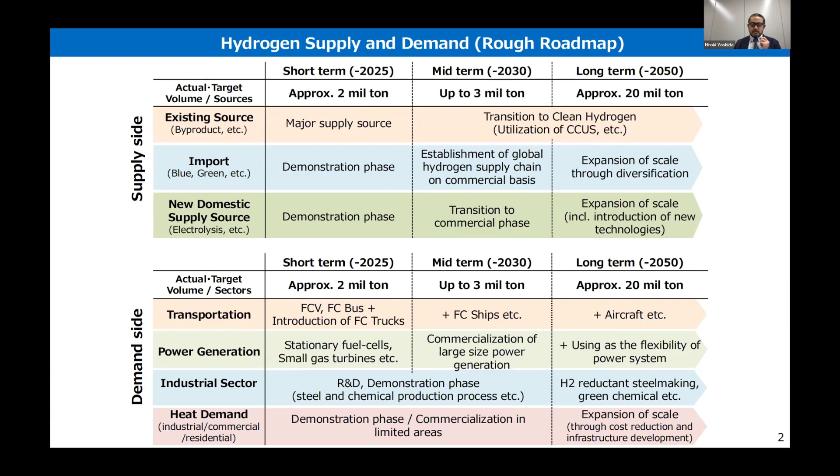We are conducting large-scale electrolyzer demonstration projects in Fukushima and Yamanashi: an alkaline electrolyzer plant in Fukushima Prefecture, and a PEM electrolyzer plant in Yamanashi Prefecture. Currently, large demonstration projects are underway for further increasing electrolyzer capacity, improving operation, and reducing cost of electrolyzer.

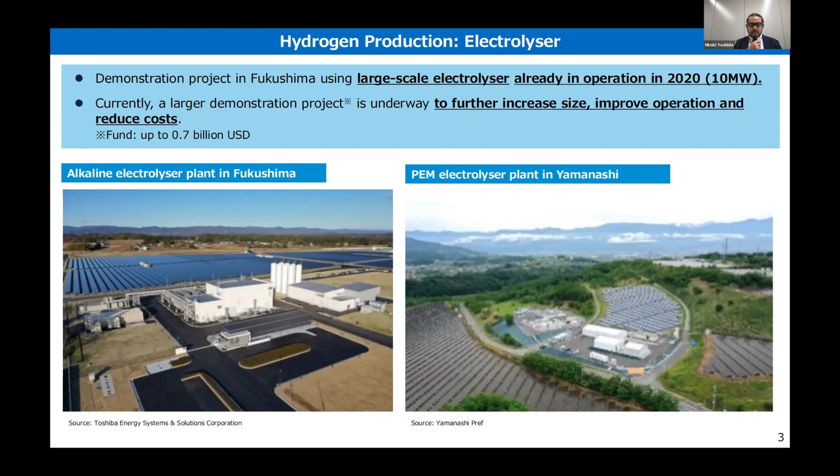We are now developing international hydrogen supply chain. Methyl-cyclohexane, MCH, as a hydrogen carrier, the demonstration project was completed in June 2020 between Brunei and Japan. A liquefied hydrogen carrier completed the world's first maritime transport to Japan in February 2022, including loading and unloading of liquefied hydrogen, followed by a large-scale demonstration project aimed at commercialization by 2029.

Japan does not have sufficient renewable energy potential, and Japan is an island country, so Japan is developing maritime transportation technology for hydrogen. We believe this technology can unlock and enable the potential of countries with abundant renewable energy potential, including Africa and South Africa, for international hydrogen trade.

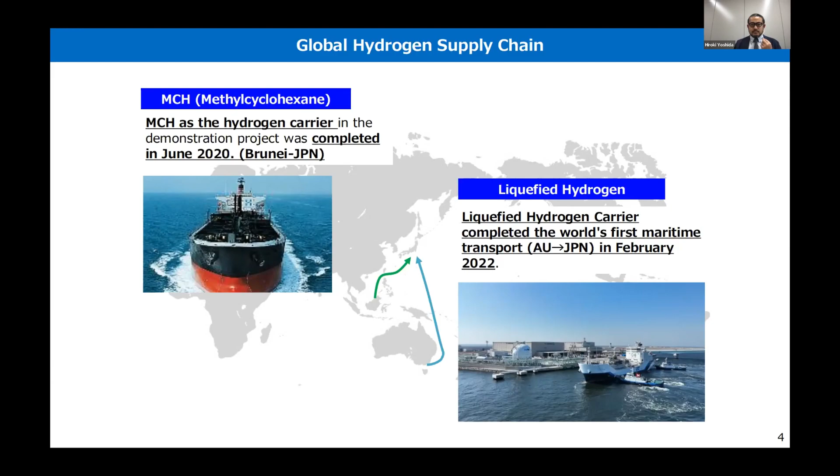Currently, approximately 7,600 FCVs and 180 hydrogen refueling stations (HRS) are deployed as of January 2023. Fukushima Prefecture and Toyota are preparing to start an FC truck demonstration project, including refueling timing management. We are also starting to develop a high-speed refueling protocol for heavy-duty vehicles.

In addition, hydrogen refueling stations are trying not only to expand refueling volume to vehicles, but also to provide hydrogen for multiple uses. Moreover, hydrogen and ammonia are expected to be used in ships and airplanes in the future.

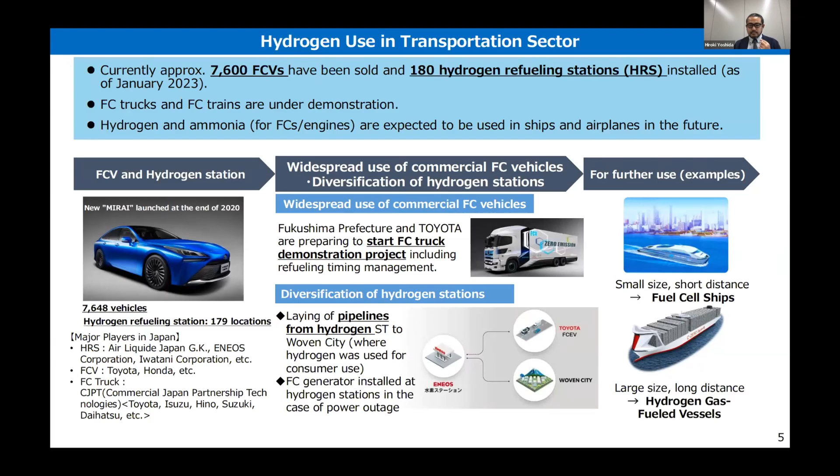Japan has been a world leader in hydrogen power generation technology. Demonstration projects are underway for both large and small turbines. We understand that power generation contributed to balancing renewable energy fluctuations, meaning power generation is still important even as renewable energy sources increase. Japan will contribute to world efforts to commercialize hydrogen power generation.

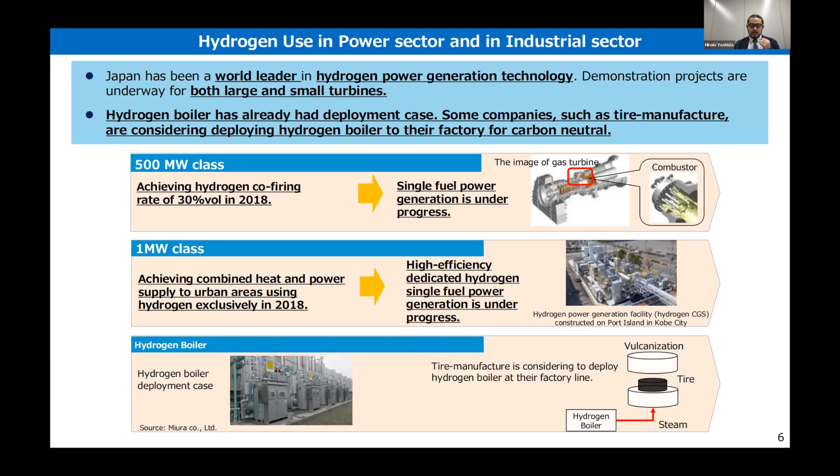Hydrogen boilers already have deployment cases. Hydrogen is expected to be used as a heat source at high temperatures required in industry processes. Projects using hydrogen as a heat source are underway in diverse fields, including auto parts manufacturing, tire manufacturing, and coffee roasting.

In order to create a hydrogen implementation model, we are encouraging regions, private companies, and relevant bodies which have potential for hydrogen activities to start discussion, feasibility studies, R&D, demonstration projects, and/or actual implementation. A kind of regional model or hydrogen cluster is called a hydrogen hub or hydrogen valley.

This is a snapshot of Fukushima. Fukushima Prefecture, located in the north part of Japan, is one of the active prefectures for hydrogen. They have the Fukushima Hydrogen Industry Academia Government Collaboration Committee in order to share progress of hydrogen projects and discuss how to develop local industry with hydrogen.

As you know, NEDO is handling the demonstration project for a large-scale electrolyzer with renewable energy at the Fukushima Hydrogen Energy Research Field, FH2R. Fukushima Prefecture and Namie Town are using hydrogen and fuel cells for their public facilities. This hydrogen comes from FH2R.

Fukushima Renewable Energy Institute, AIST, FREA, conducts R&D related to hydrogen and supports the technology development of companies and universities. Sumitomo Rubber Industries, a tire manufacturer, has started a demonstration project for deployment of a hydrogen boiler at their factory line. Denso, a car parts manufacturer, also has started a demonstration project for using electric heaters and hydrogen burners in their production line. Iwatani and Soma Gas Group, gas providers, have started feasibility studies for blending hydrogen into their gas services.

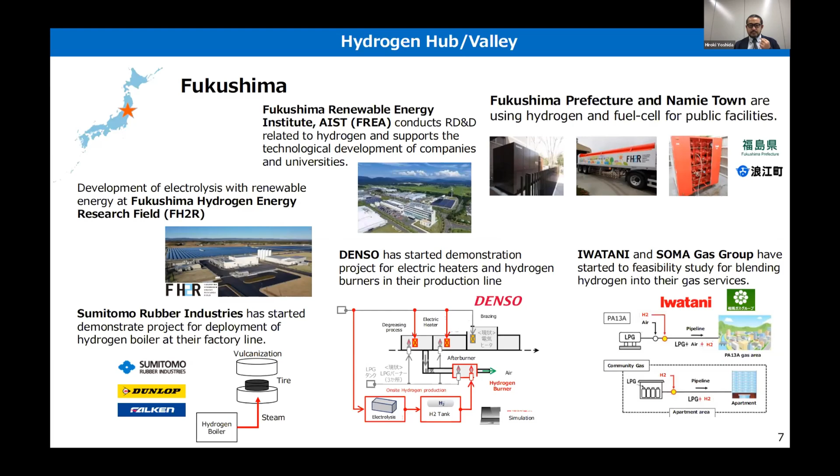This is another snapshot of Yamanashi. Yamanashi Prefecture, located in the center of Japan, is another active prefecture for hydrogen. They have the Yamanashi Hydrogen and Fuel Cell Related Industry Development Committee in order to share progress of hydrogen projects and discuss how to develop local industry with hydrogen.

Yamanashi Prefecture has developed renewable power plants and hydrogen technology for many years. Yamanashi Prefecture started to develop a 16 megawatt class integrated electrolysis system and hydrogen boiler in cooperation with Toray, Hitachi Zosen, Siemens Energy, Kaji Technology, and Miura.

UCC Ueshima Coffee has started a demonstration project for hydrogen heat use at their factory, especially for roasting their coffee product, in cooperation with Yamanashi Prefecture, TEPCO Energy Partner, Toray, and Tomoe.

Yamanashi Prefecture is not only doing R&D and demonstration projects, but they also established the Yamanashi Hydrogen Company, YHC, with Toray and TEPCO Energy Partners to provide power-to-gas services as an output and outcome of their project. In addition, Yamanashi University is doing hydrogen-related R&D, such as electrode catalyst development for high performance and cost reduction. Also, the Association of Hydrogen Supply and Utilization Technology, HySUT, provides human resource development services for hydrogen refueling stations.

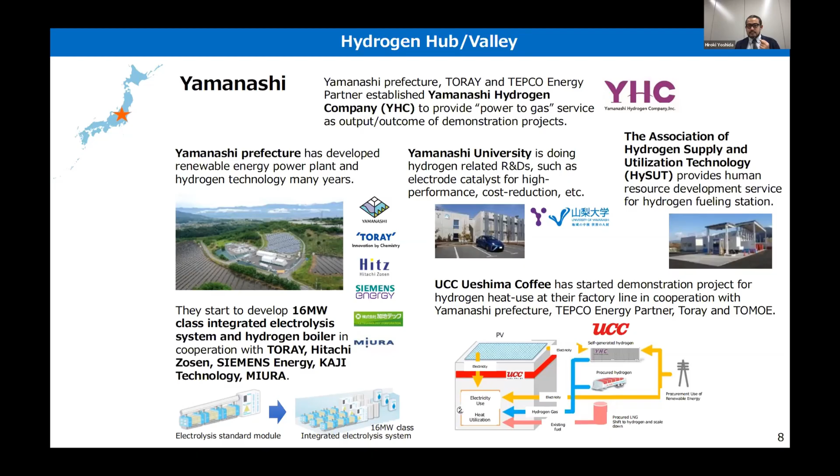We have a lot of R&D and demonstration, but we need more effort to actually use hydrogen in this field. So METI established a new subcommittee for hydrogen policy in March 2022. The subcommittee has had intensive discussion on a support scheme for narrowing the price gap between clean hydrogen and counterfactual fuels for a set period, and on a support scheme for developing infrastructure.

The subcommittee will continue to develop details this year.

Japan launched the Hydrogen Energy Ministerial Meeting, HEM, in 2018. We believe the Hydrogen Energy Minister Meeting is one of the most ideal meetings for hydrogen-related ministers and top executives to express and discuss direction to build a hydrogen society and future initiatives. METI and NEDO held the fifth Hydrogen Energy Minister Meeting in cooperation with IEA as a part of Tokyo GX Week on September 26, 2022.

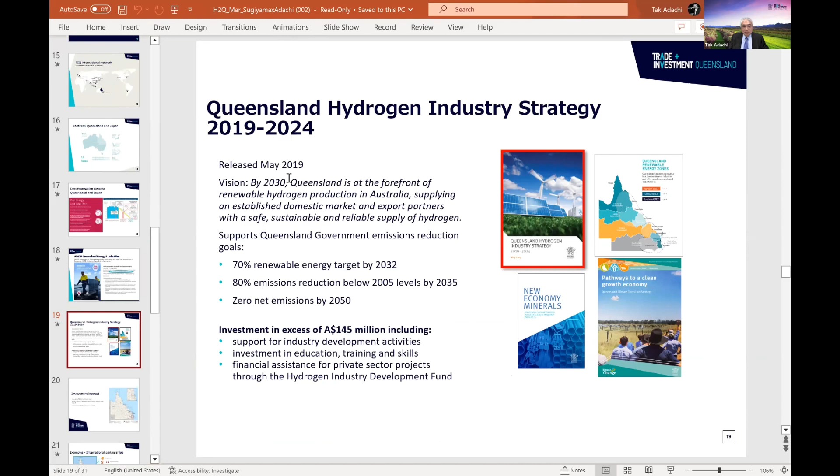We also launched the Queensland Hydrogen Industry Strategy in 2019, the same time our Premier actually visited Japan. Since then, we've been seeing a lot of investment in the renewable sector. We've seen in excess of 100 investment leads across Queensland, not just export-driven projects, but also domestic, local demand type projects.

In the last couple of years, we're also seeing a lot of related manufacturing opportunities emerging, including electrolyzer, pumps, and water-related technologies, which is great for building the supply chain.

In terms of international partnership, I think this whole hydrogen industry development requires more than one country. We need a lot of expertise and strengths from different partners. These are some examples of international partnerships happening across the state, and many of them are Japanese companies. Just to pick up a few examples, even this year we're seeing some of the latest developments.

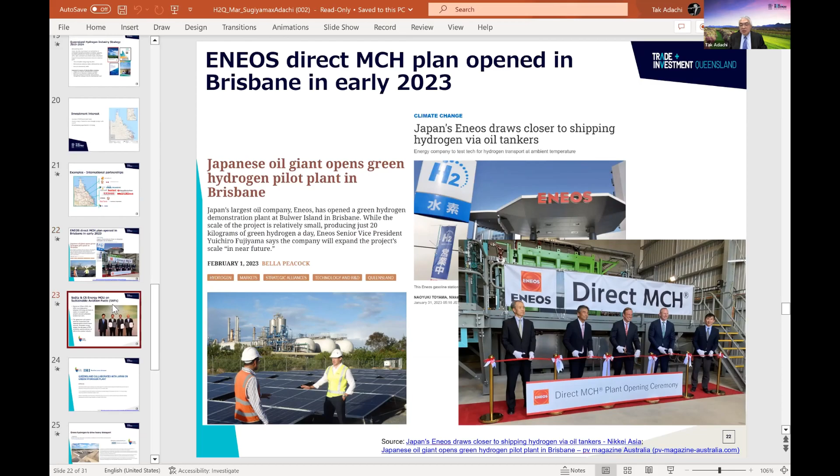ENEOS Corporation opened a demonstration project in early 2023, in late January. I had the pleasure of attending the opening ceremony for the demonstration plant in the Port of Brisbane. And this month, one of our government-owned corporations, CS Energy, signed an MOU with Sojitz Corporation for green hydrogen, but also sustainable aviation fuel and e-fuel.

I'll stop here, and I wanted to introduce Sugiyama Sensei from Tokyo University. Instead of going through the presentation from this point, I wanted to throw a few questions, tough questions, for Sugiyama Sensei, and he can probably elaborate on those.

Sugiyama Sensei, the first question: since your first visit to Queensland more than 5-6 years ago, you've seen lots of developments concerning Japanese hydrogen activities in Queensland and broadly in Australia. What do you see, from your point of view, as the key drivers behind the interest and activities we're seeing from Japan?

Okay, Tak, can I share the slide myself? Yes. Okay. By the way, hello everyone.

I'm Sugiyama, and I'm pretty excited to be able to participate in this wonderful event. To answer Tak's initial question, yes, as Mr. Yoshida addressed in the preceding slot, we're more seriously thinking about how to realize carbon neutrality, or net zero, in Japan by 2050. We actually have not a small number of quantitative assessments as for the pathways and scenarios for that carbon neutrality.

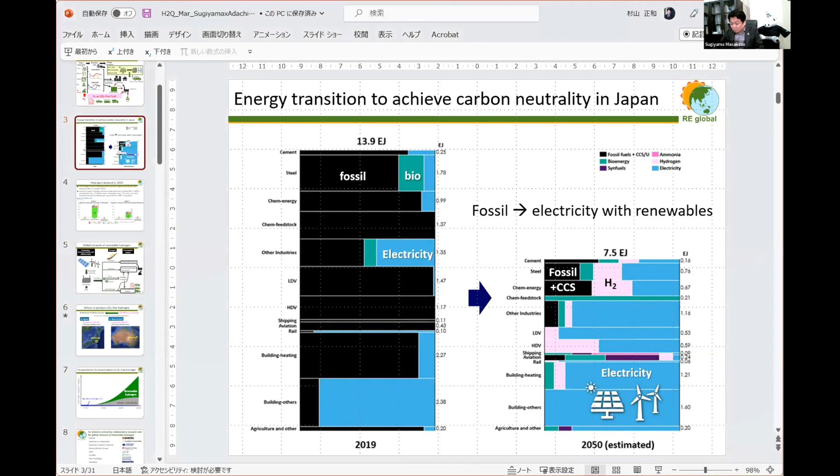This is one example which is currently under discussion in my community at the University of Tokyo. I hope this is on your screen. Is it correct?

Can you see my slide? Yes, okay, good.

This is the left-hand side of the existing picture, and the right-hand side is our aggressive scenario, which realizes carbon neutrality in 2050. Please notice that in this aggressive scenario, most of the energy demand should be shifted to electricity, because electricity can be fed domestically by either solar or wind.

This is very important, but to realize this picture, we need a tremendous capacity of solar. For example, the most aggressive installation of solar will amount to 600 gigawatts. This is 10 times larger capacity than we have in existing Japan. So realizing this very aggressive picture, mostly powered by renewable electricity, is something we need to struggle to realize, but it's not easy.

The second item, shown here in pink, is hydrogen. This hydrogen is for industry sectors other than electricity, but also for electricity, if renewables are not well disseminated. More scientifically, even if we try to disseminate renewables, which are intermittent, we still need an alternative or adjustable power generation mechanism to supplement the fluctuation of solar and wind, which is mostly gas firing. But gas firing can never be natural gas in 2050 because we need to realize carbon neutrality. So hydrogen is the only method that gives us a way to realize carbon-free gas firing power generation.

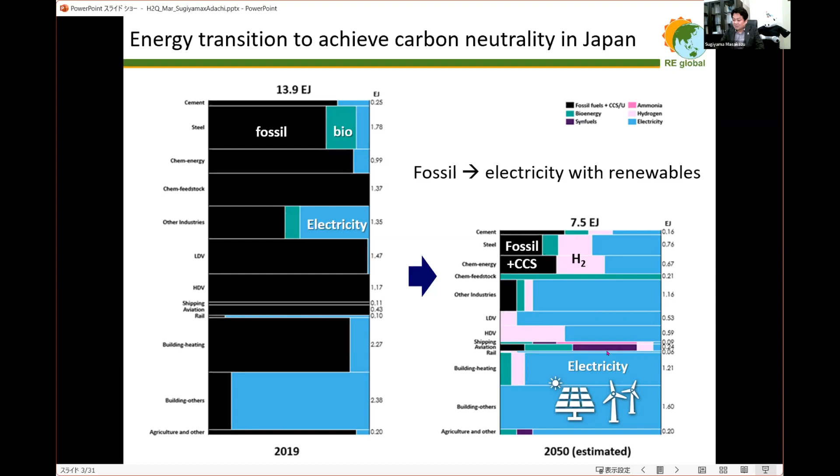So it's quite obvious that we need a tremendous amount of hydrogen in Japan to realize carbon neutrality, depending on several scenarios. If we aggressively introduce domestic solar and wind, the amount of hydrogen needed is less, but we will still need close to 20 million tons per year of hydrogen.

This is quite equivalent to the Japanese government strategy. But if aggressive installation of solar and wind is not possible, we will actually need double the amount of hydrogen, over 40 million tons per year. So this gives us a hard trial of where to secure hydrogen, right?

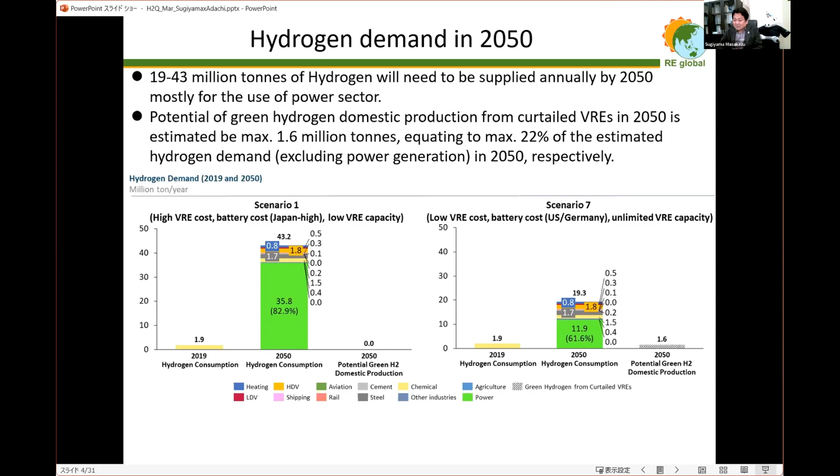There has already been discussion about where to secure the power to generate green hydrogen. If we do that in Japan, for the 20 million tons per year of hydrogen, Tokyo University would have to migrate somewhere, probably merge with Osaka University or Tohoku University, I don't know, and the emperor would have to go to Kyoto.

So this kind of conception is going to be, I think, more and more shared with the stakeholders in Japan. We are recently quite sincerely looking for any place which can give us a stable supply of green hydrogen. And of course, the hydrogen carrier technology is very important, but needless to say, that is on track with good development.

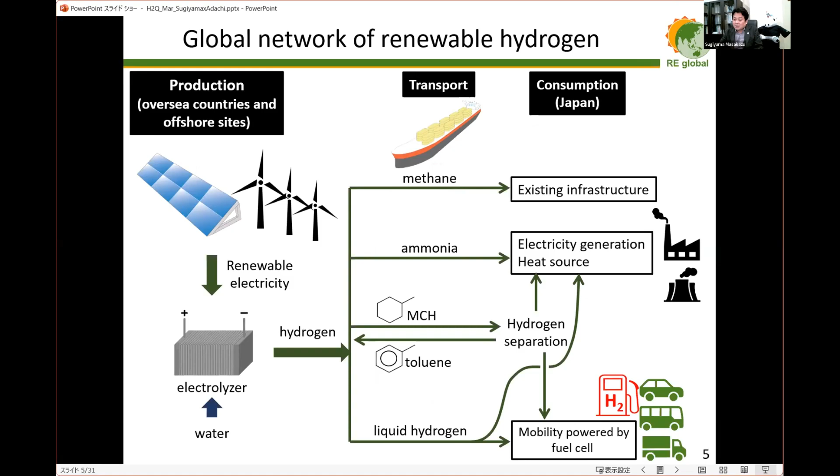So the asset for generating hydrogen is quite key to the realization of net zero in Japan, as well as net zero in Australia.

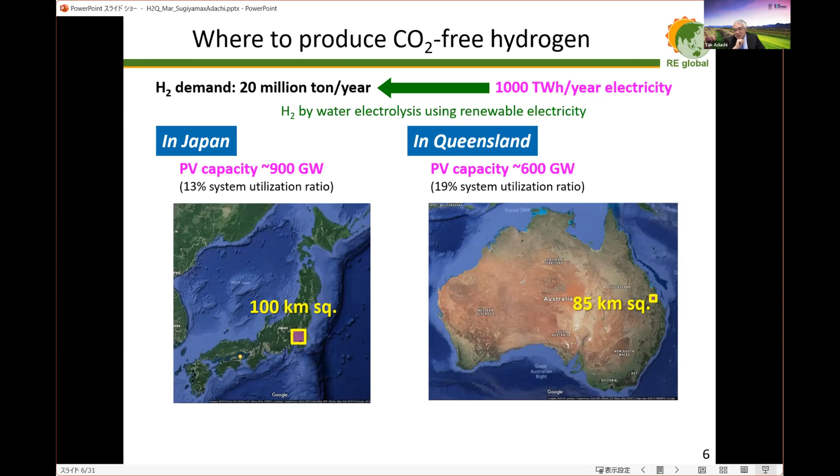And then my second question is, yes, we're all working really hard to achieve this. I think the objective is shared between Queensland, Japan, and Australia, but the key challenges we're seeing to further develop the hydrogen industry and society - from your point of view, what are the key issues and challenges that you see? Obviously technology, you're one of the leading researchers in developing hydrogen technology, but from the government point of view, we understand infrastructure and regulations, and obviously the financial feasibility or the capital, the wave of money that needs to really be put toward this industry.

I think all the combinations are probably important, but from your point of view, what are the key challenges that you see that we need to overcome? Okay, actually this is a very tough question to answer in a simple manner.

Of course, we need a multi-fold approach from the most cutting-edge technological development, which aims at the reduction of hydrogen cost, as well as the stable and abundant supply of hydrogen. That technology development has to be supported by intensive investment, because if we do nothing in particular, we'll just continue the existing energy supply scheme, and that will definitely drive us to global warming, and our life will be much harder to survive.

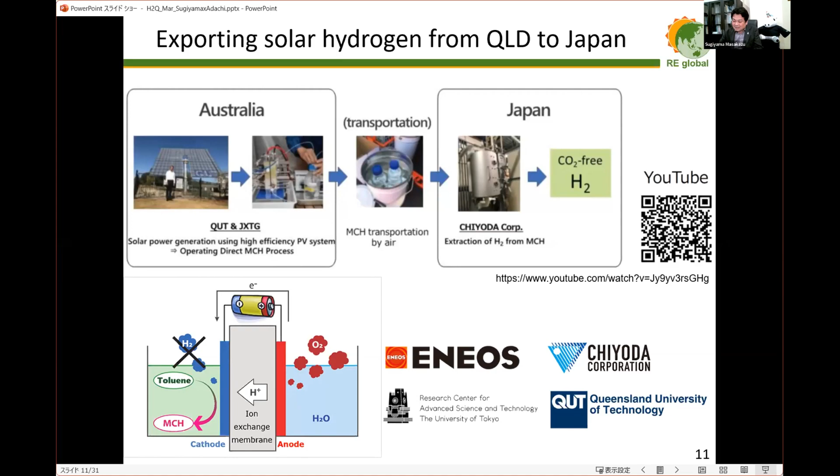But the point is that such green hydrogen needs to be visualized. So about 1.5 years ago, we demonstrated the import of solar green hydrogen from Queensland to Tokyo, and that green hydrogen taken out from the MCH was fed into the Toyota Mirai, Japan's most advanced technology.

And I have been one of the luckiest people in the world to drive the Toyota Mirai powered by Queensland green hydrogen—that was a real, prestigious experience. I'd like to spread this pioneering and encouraging approach that tells us the future is with us. But that future cannot be obtained without tremendous effort, and that necessitates our agreement on making a substantial investment.

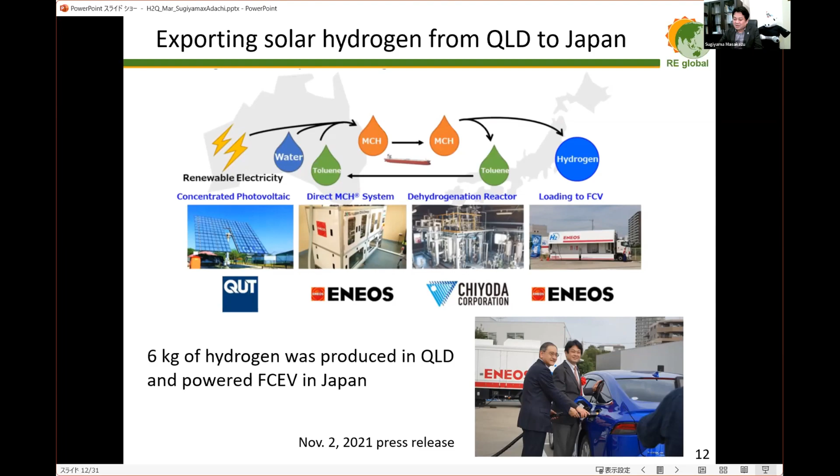Another good example is complementary mutual demonstration—meaning Japan can be benefited from Queensland, but then Queensland themselves have to also be powered by green hydrogen. So for that, visualization, something like a theme park, like a Disneyland of hydrogen, in Queensland is very important.

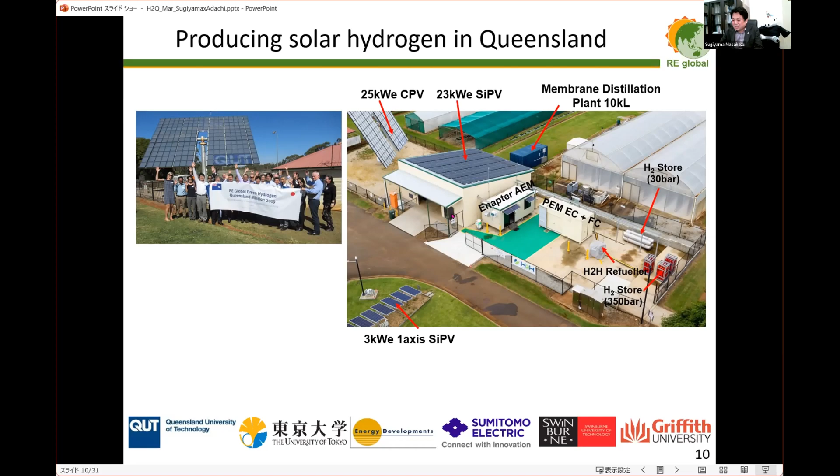In that sense, in collaboration with QUT, we have already implemented a kind of hydrogen Disneyland, which can generate green hydrogen on site, and you can plug in any new devices to this Disneyland place—you can attach new attractions to this green hydrogen Disneyland.

So this kind of activity might be vital for sharing with citizens of the world that a future powered by green hydrogen is reality, but our support is vital. That kind of concerted agreement might be, largely speaking, quite a clue to realizing our energy transition.

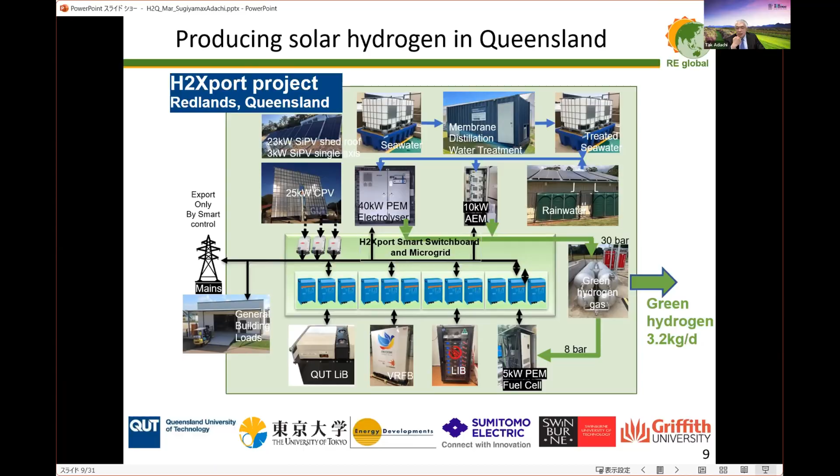Well, that's great, Sugiyama Sensei. You touched on a couple of very important points, like public acceptance, the capital, and the commitment needed to make it happen, and also the green jobs or creations along the way—skills that are actually quite mutually beneficial between Japan and Australia and Queensland, because as you said, we're building a new industry, and the public embraces it along the way.

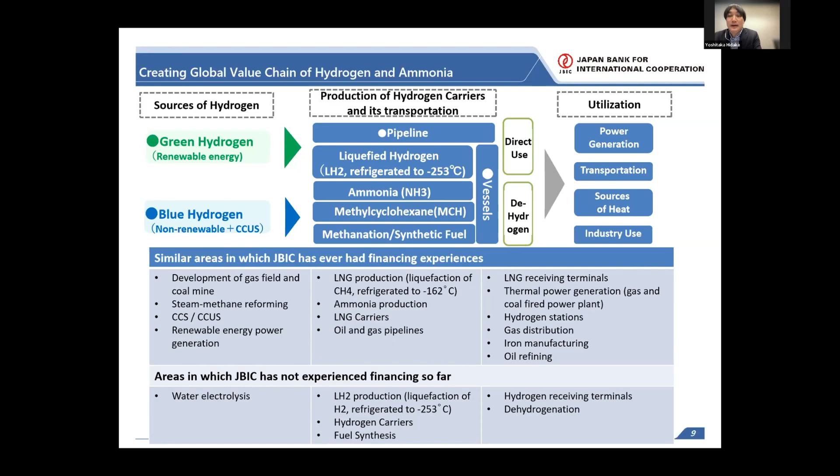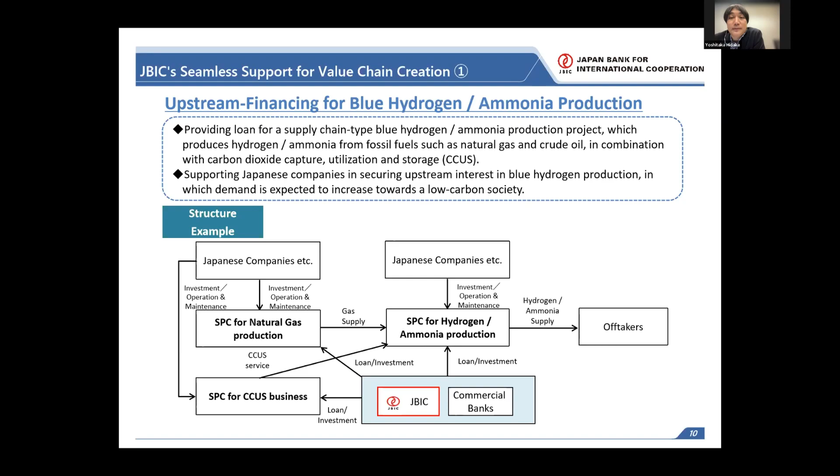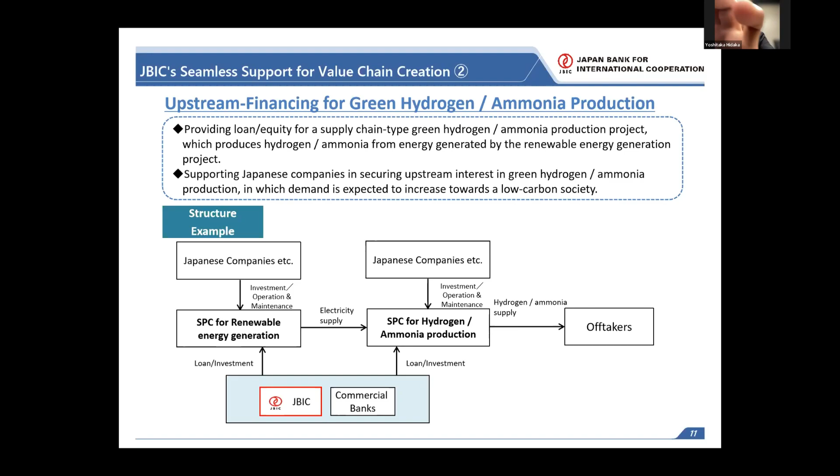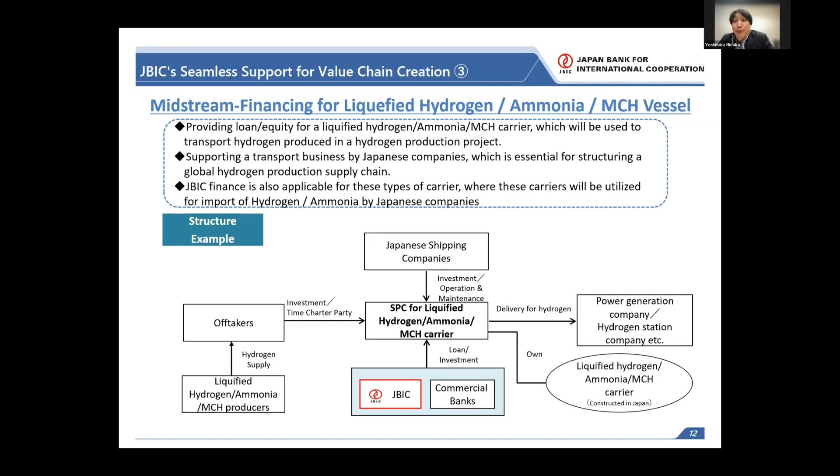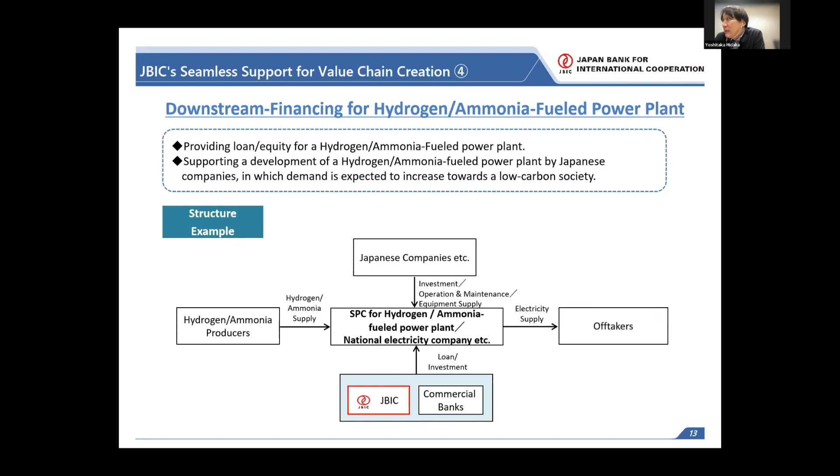This is a downstream financial structure example. We are supporting hydrogen ammonia fueled power plants, even though it's mixed combustion or single fuel combustion.

This is an example of our seamless support for creation of a global value chain. As I told you, we are supporting Japanese companies' overseas activities in relation to hydrogen ammonia, such as production of hydrogen ammonia itself, and also transportation and utilization projects. But in order for us to complete the global value chain, even though there is no Japanese company involvement, if there are missing parts or critical infrastructure directly related to Japanese companies and projects, such as port development, port installment of shipping tanks for hydrogen or ammonia, or receiving tanks, these essential infrastructures are going to be critical to create a global value chain.

Then we would like to provide untied loans to the host government or government-related entities or enterprises, if necessary. We are supporting from upstream, midstream to downstream, every possible related project.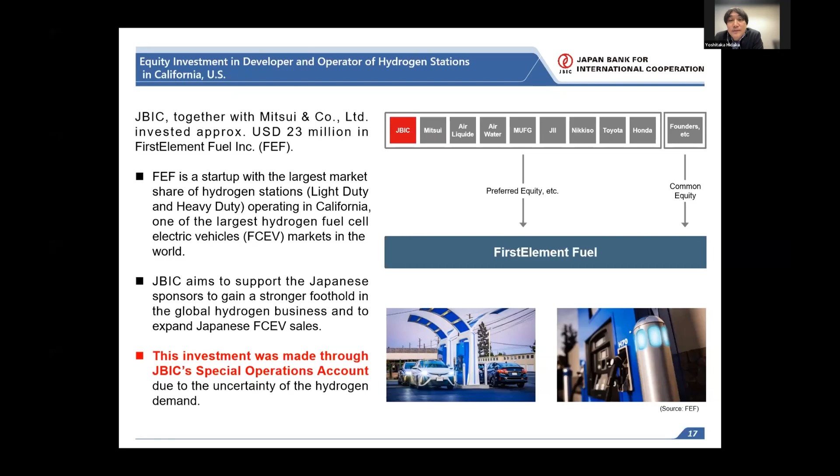I head up Wood Mackenzie's Power Renewables Consulting team, covering the APAC region, and I'm based in Singapore. For those of you who are not familiar with Wood Mackenzie, we're actually a global leader in the energy research and consultancy space. We cover the entire energy spectrum, from upstream oil and gas through downstream refining, chemicals, metals and mining, and the sector we're sitting in currently, power renewables. For my sector in particular, we cover the entire global markets, and I look at the APAC market specifically, Japan included, in quite a bit of detail, given the interest in the Japan market today. In parallel, we have a hydrogen team that looks at the growth of the hydrogen market, given how important it is as an energy transition fuel going into the near future. So we marry these two together essentially, and we look at how hydrogen, or specifically green hydrogen, can help decarbonize the power industry. This is the focus of my presentation today, and I'm happy to take questions after if you have any.

Jumping straight in, I think one of the earlier presenters actually mentioned this as well—most of you are aware there's a lot of end-use application potential for hydrogen. Even today, there's a lot of hydrogen demand through the methanol, fertilizer, and refining sectors, but mainly through gray hydrogen at the moment.

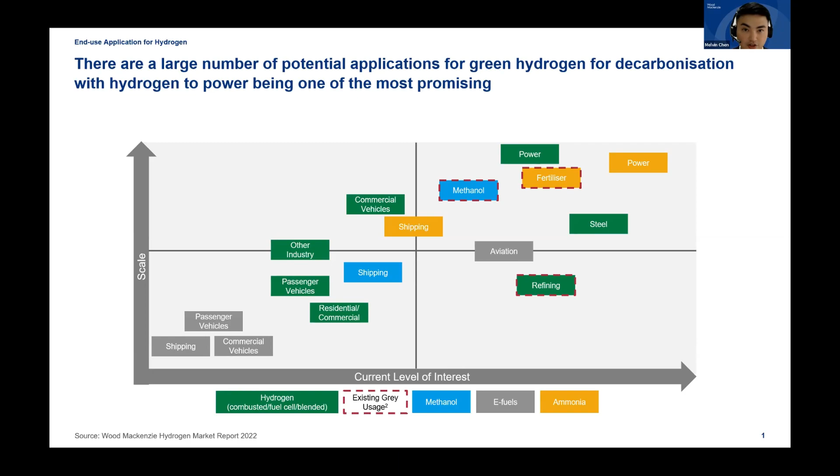I don't think there's a consensus today in terms of how we do it. A lot of it is in pilot stages. A lot of these various projects, or ways to decarbonize each of these sectors, are very much in a theoretical conceptualization stage at the moment. But again, there is a lot of potential, and we do see a lot of end use demand for hydrogen eventually.

And here we have a quick snapshot in terms of where we think the demand for green hydrogen could sit across different sectors globally out to 2050. As you can see here, today, refining, methanol and ammonia already command high demand for hydrogen. So there's a low hanging fruit essentially where you can switch to green hydrogen, notwithstanding cost, of course, from a parity perspective.

But where we see the largest potential in terms of green hydrogen penetration is really through the power sector, through co-firing or blending of hydrogen or ammonia into your power systems with your current thermal fuels, in order to help decarbonize the system. So from this perspective, we see power as the leading driver for green hydrogen from the medium term onwards, from the 2030s onwards, and that will really define how much demand for green hydrogen there could be, as part of this overall energy transition.

Another thing to point out in this slide is that this is purely from a current situation perspective, what we call a base case scenario. The energy transition is not going to be a linear process. It's going to have a lot of twists and turns along the way. But the way we see it, from a base case perspective, we're not going to be meeting the Paris Agreement targets of 1.5 degrees. Our base case translates more to a 2.5, 2.6 degree world.

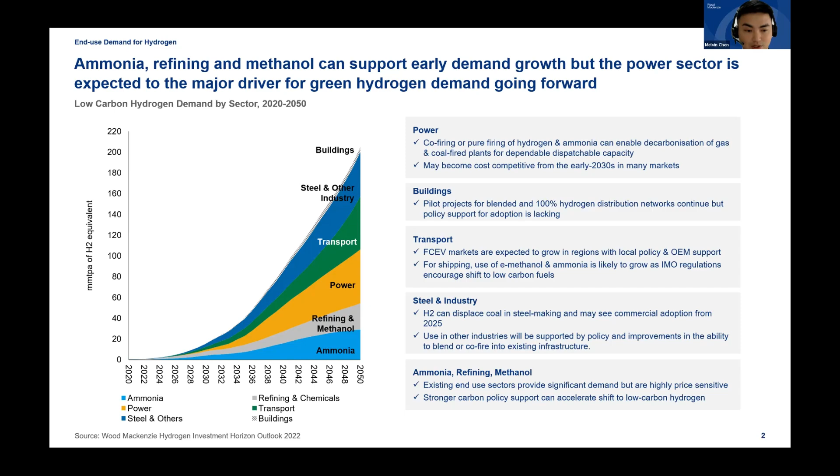So if I were to briefly touch on how Japan sits in terms of green hydrogen, and why green hydrogen is needed - and I think the earlier speaker also mentioned this - if you look at it from a power system perspective, today in Japan the power system is still dominated by thermal, mainly gas, with coal. And it's a similar situation in many countries across Asia Pacific, which is how legacy systems tend to be.

Over time, you definitely see a lot more wind and solar penetration, and this is what a lot of the policies and government initiatives are geared towards, incentivizing greater growth in renewables, especially through solar and wind.

But to a certain level, you need to retain stability in the market. You need to ensure you have a flexible power system that can meet the needs. Going back to the energy trilemma, it needs to be sustainable, it needs to be affordable.

So in this case, renewables by itself cannot be the final solution. You need to start bringing in things like battery storage, which by itself is not cost effective or cost competitive at this moment, or other forms of base load. If you're blessed with hydro, geothermal, that's great. Nuclear is always part of the equation, depending on how you term it as green or not, depending on which geography you're sitting in at the moment.

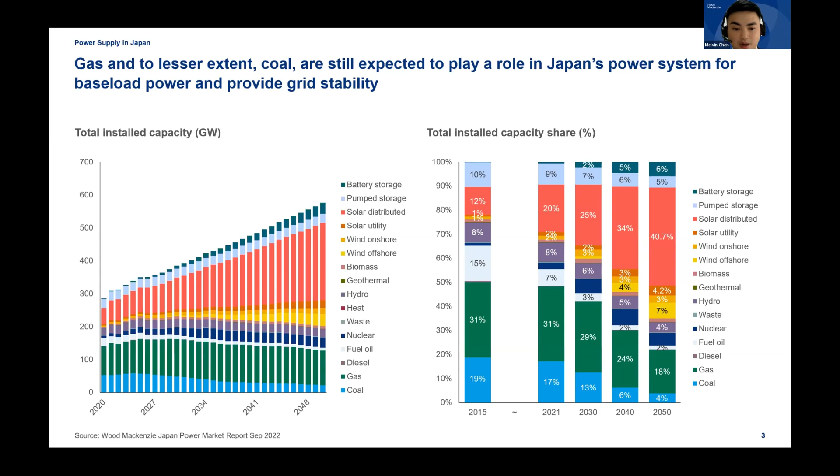So from that perspective, there's a few challenges in terms of how we can get green hydrogen more mainstream into the power sector. There's really two key challenges here that we see.

I think the first challenge is really from a technical perspective. Today, your gas turbines or boilers do not allow for 100% firing of hydrogen within the system. They're not designed for such usage.

There's a lot of initiative - Japan is leading the way. Earlier, some of the speakers did mention some of the projects ongoing at the moment in terms of trialing, piloting hydrogen co-firing, blending into the gas-fired CCGTs, as well as ammonia co-firing into coal-fired power plants. This is really to understand the technical limits of current plants, of current technical designs, to see how far we can push the envelope. There's numbers being thrown around - 20-30% these days in terms of how far we can push it.

Nobody really knows, to be honest, in terms of how safe it is, how technically feasible it is, without causing long-term damage to the plant itself. So this is all being tested at the moment.

But it's not just Japan that's doing it. Australia, Europe, the US - you see many projects being taken on, led by both developers and OEMs alike, to really understand the technical challenges in terms of how we can get a greater penetration of green hydrogen into the power system at its current level.

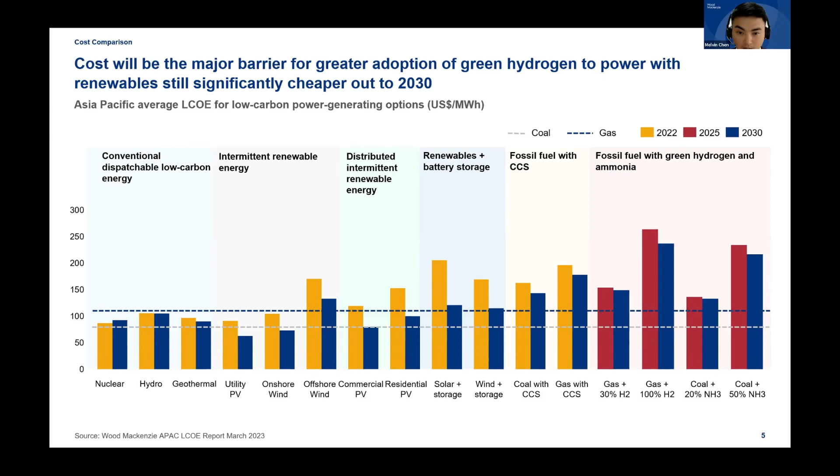So where do we see green hydrogen getting to cost parity with your gas-fired generation, which is really the first level of test, because again, your competition is not really with renewables, as you can see in the earlier picture.

And the way we see it is, from a cost parity perspective, it's probably going to happen somewhere in the 2030s. There's a lot of moving parts in terms of how we can get there. First is, of course, how quickly the cost of hydrogen can scale.

I noticed a question in the Q&A panel earlier on in terms of how likely it is that green hydrogen or hydrogen in particular cost is going to come down. Is it going to be the same trajectory as solar, for example? The quick answer is yes, but how quickly is the big unknown, because there's so many variables to it.

One of the biggest drivers is really the cost of your electrolyzers, and there's so much R&D going on, so much supply potentially coming on, and we could see economies of scale taking off. So from that perspective, we could see that coming down.

Energy inputs, which means renewables, cost of renewable storage for example, will also be an important cost and how quickly that scales down. So again, it's not just from a purely competitive standpoint, it's also from an input standpoint. The faster renewables cost comes down, the faster you can push down your green hydrogen cost as well.